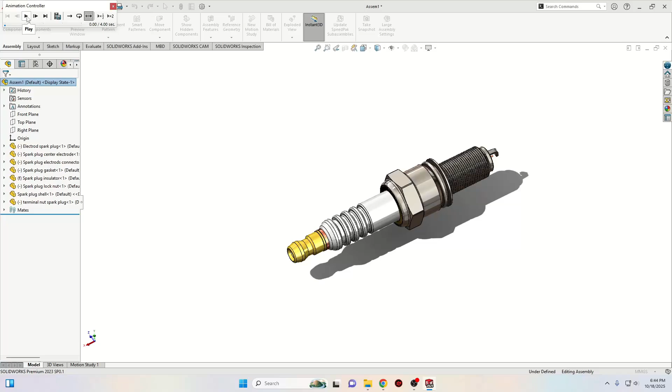My name is Alex and today we're gonna make the assembly of this spark plug. We already have all the components and now let's go ahead and start making this assembly.

First, let's open a new SolidWorks document. This time we'll select here assembly, press here OK, and now let's import all the components. So we'll go to browse and select all the components where you have them. And then click open. And let's place them.

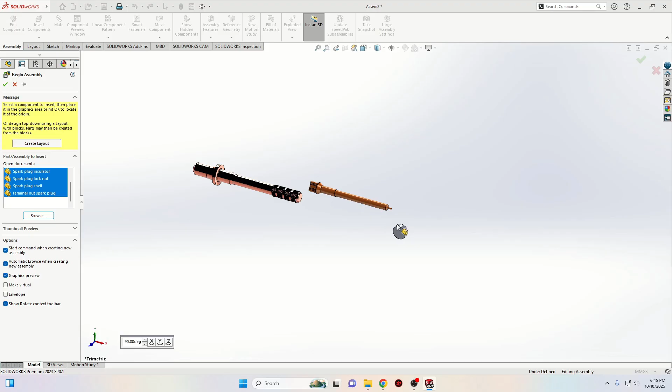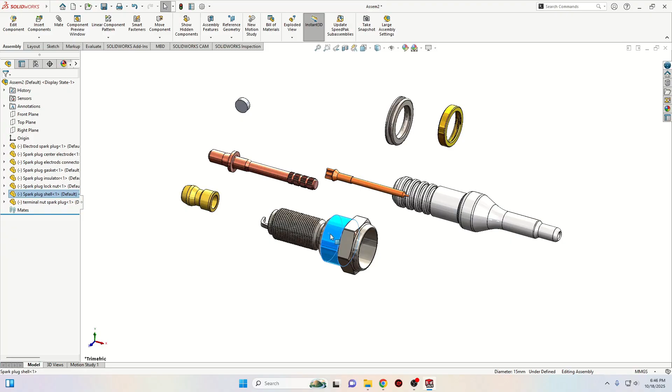Alright, let's make this plane white. And now the first one you import is going to be fixed, so in my case it's this one. I'm gonna make it float and I'm gonna make this shell fixed. Alright, and now let's begin.

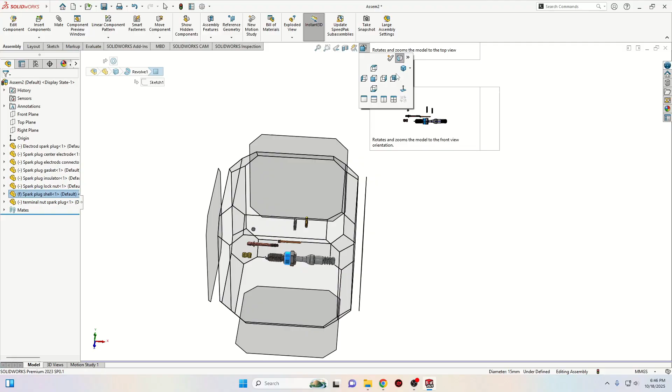First select this face with this one and select here concentric. We'll click here reverse the direction. Okay, and now let's select this and let's see if we can make it. No, it's not good. Let's make it back and let's go to the spark plug shell and let's look for the front plane or top plane.

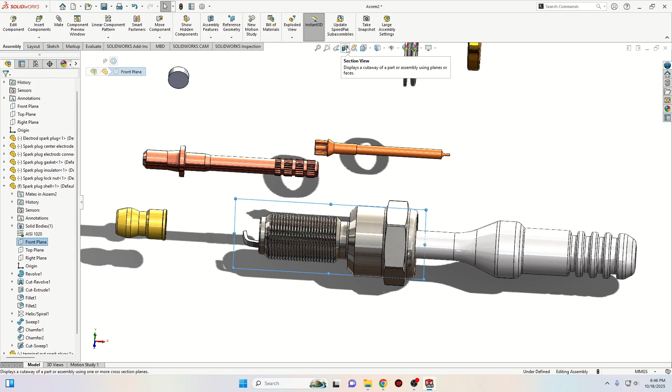Let's select front plane and then select here section view. And now we can see it like this. Press OK. Now we should be able to see inside these two. This is gonna make it easier for us. So let's go ahead and

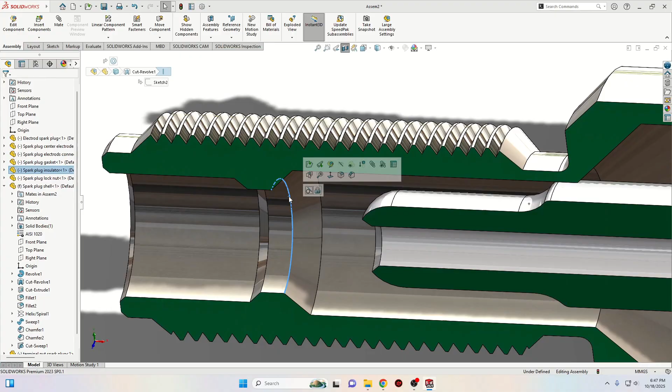assemble this. Now let's select this edge with this face. So this, okay, this face with this edge should be tangent. Okay, this should be good.

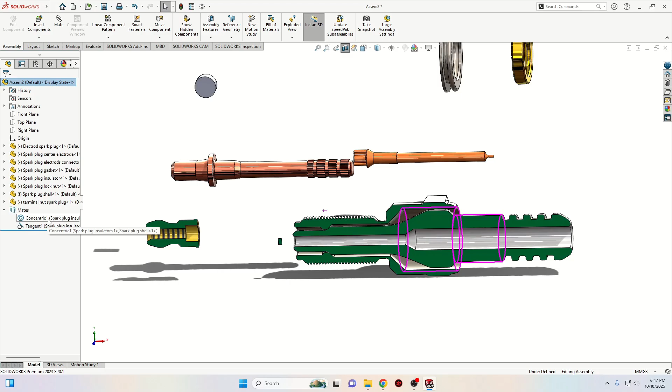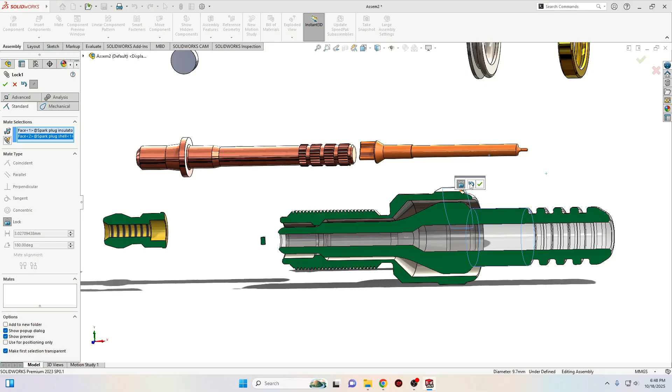I don't know what other mates I had that should have been broken, but sometimes there are some errors. Anyway, now we'll have to select mate from up here and then select this with this one. And we'll select here lock the two components together. Press OK. Now they are locked together.

The first mate was just for a reference to bring them as close as possible. And now that we lock them together, they are going to stay like this. Now let's insert the next component. And the next one will be this one, the electrode.

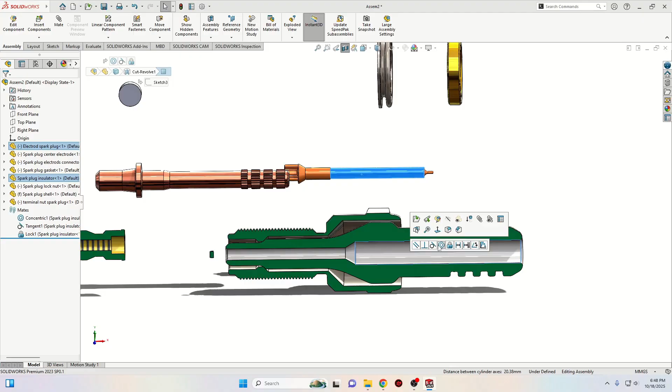So we'll select one of these faces with this one and select here concentric. We'll have to reverse the direction. And now let's bring it like this and then select this face with this one and select here make tangent. Okay, that's very good.

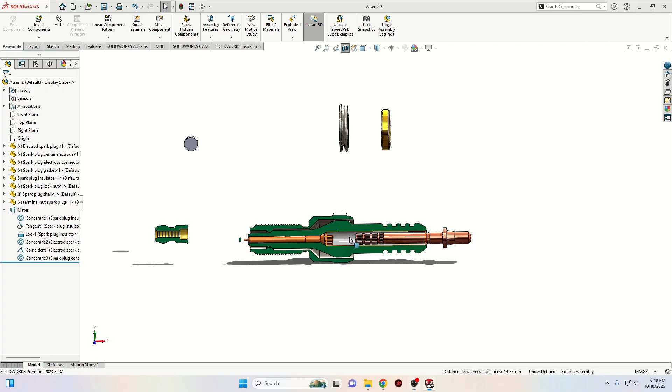Now we'll select this other electrode and we'll select also this face from the insulator. Select here again concentric and make sure that it's like this. And then we'll select this face, the small face with this one, and select here coincident.

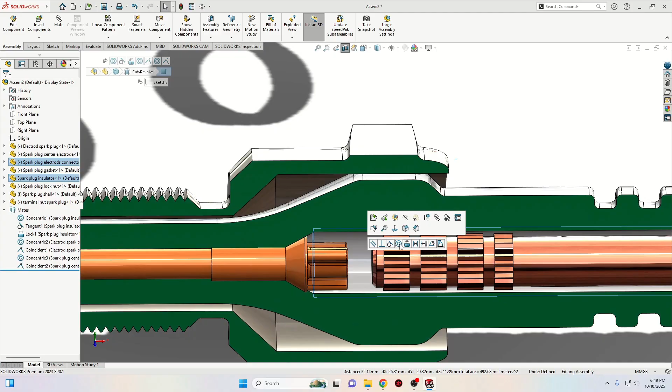And now here is the space for the electrodes connector. So select this face with this one, select here concentric, and now we'll have to bring it right here. So to do this, we'll select this one, and every time you have to select more than one face, for example right now, you'll have to keep Ctrl pressed to keep selecting them.

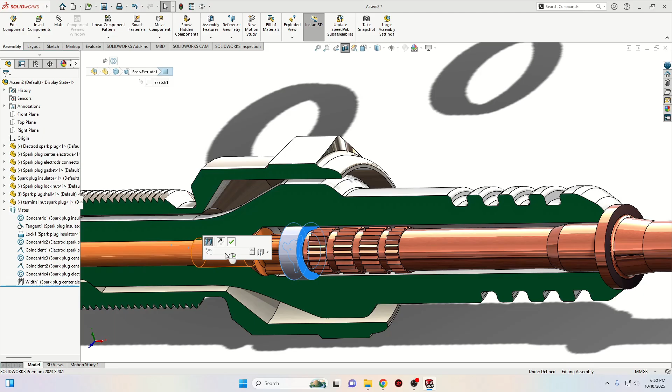And we'll select these two faces with these two from the electrodes connector, and then we'll have here width. Click on this one and press OK. And now this one is exactly in between these two electrodes. Nice. And now let's also bring this component.

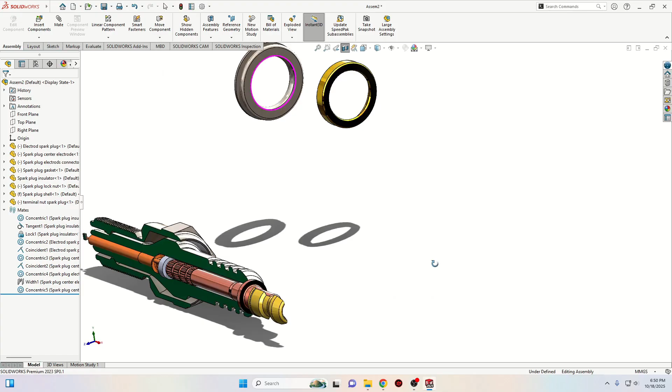So we'll select this face with this one, select here concentric. It should be like this. And then select this face with this one, select here coincident. And now let's insert the lock nut and the gasket.

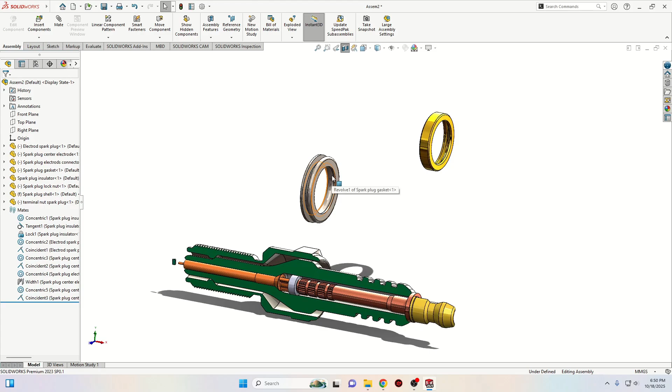First, let's select this face with this one, select here concentric, and then select this one with this one and select here coincident. Okay, and now let's insert the lock nut.

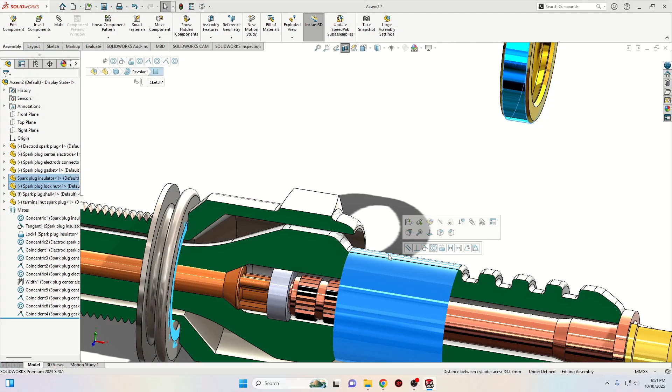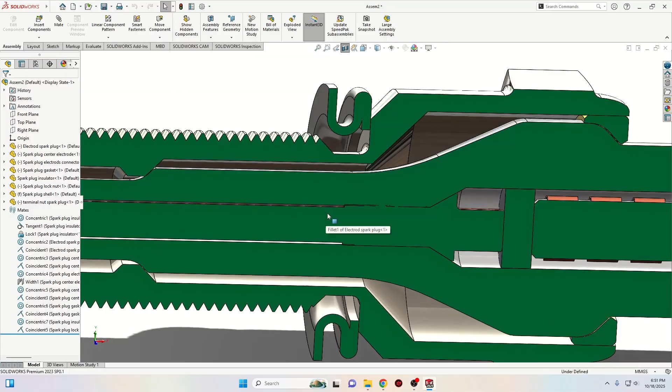Select this face with this one from the insulator, select here concentric, and then we'll have to select this face with this one and it should coincide. And now everything should be okay. Now let's hit the rebuild and we'll be able to see everything in the section view. And this should be all the components.

Let's close the section view, and this is how this spark plug should look. This was the tutorial for today. This was the assembly of the spark plug.

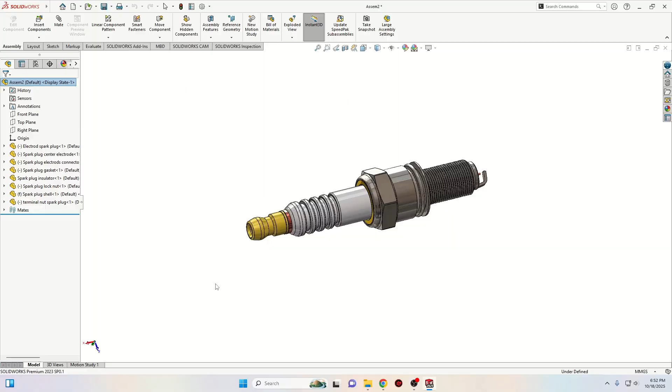And if you have a problem here with the shell because this insulator is too long here, watch my last video where I'm showing you how you fix this, because it was a small mistake in the dimensions for this shell.